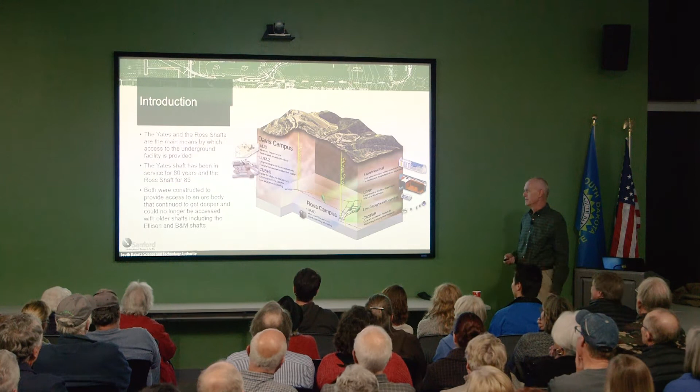This graphic here is a nice representation that shows where the Yates and the Ross shafts fit relative to the 4850 level and a lot of the experiments that are either under construction or being built. And it basically shows how important those shafts are. They are the way to get down to where the science is happening. The Yates shaft has been in service for 80 years, and the Ross shaft has been in service for 85 years. Both originally were constructed to provide access to an ore body that continued to get deeper and could no longer be accessed with the older shafts. And those older shafts were the Ellison and the B&M shafts.

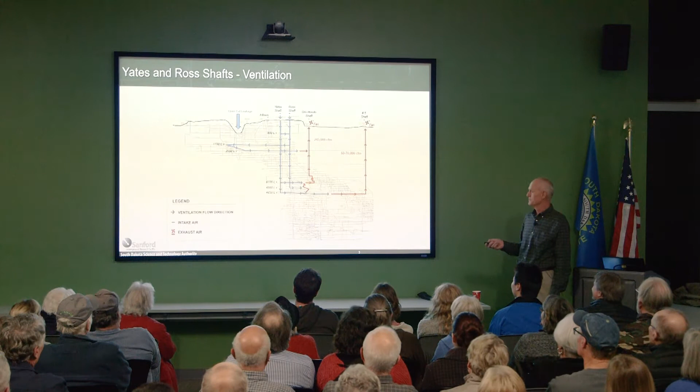So another important feature and function of the Yates and the Ross shafts is that not only do they provide access to the facility, but they're the conduits by which the fresh air enters the mine, the lab. So on this representation, you can see the long section of the old Homestake mine workings and where the Yates and the Ross shafts fit here. And the blue color and blue arrows represent the fresh air that goes into the facility. So this demonstrates that this is also an important feature. This is what makes the Yates and the Ross shaft very important to the operation of the facility. So we're going to talk a little bit first about the Yates shaft.

So the Yates shaft was constructed for two primary reasons. It was constructed after the Ross shaft was done, and it was well known that the Ross shaft would not be able to keep up with the production demands for the Homestake mine. In addition to that, the Ellison shaft was reaching the end of its life, and it needed to be replaced. So construction began back in 1938 and was completed in 1941.

The shaft was named after one of the general managers for the Homestake mine, a guy by the name of Bruce Yates. Not unlike a lot of other shafts, it was constructed in phases. First phase got it down to 4100 level, and eventually it was deepened to the 4850 level in 1954.

And the type of construction that was used for the Yates shaft involved what is called a pilot and slash method. What this basically means is that raises were driven from the bottom level all the way up to the very top, which creates a pilot hole. And how that's advantageous is that it enables the excavation to be done from the top down, and the blasting is basically done into the pilot hole. The muck falls to the bottom, and it speeds up the whole process of shaft sinking.

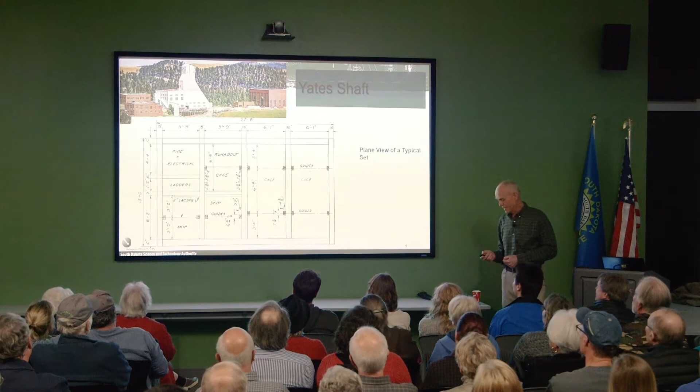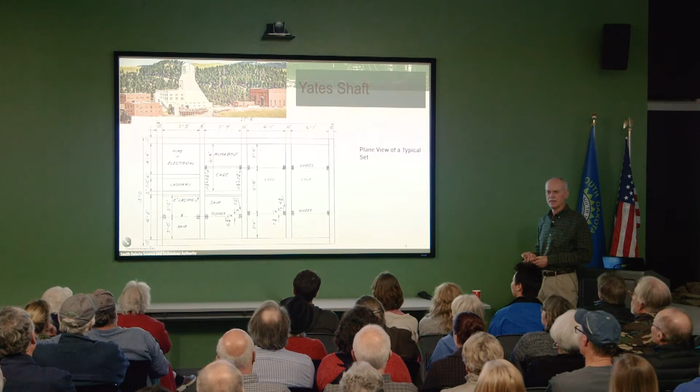So this is a plan view of a typical shaft set for the Yates shaft. The dimensions are 27 feet 8 inches in this long section and 15 feet in width. And it shows you the various compartments. There are 2 cage compartments where the cage conveyances ride up and down. There are 2 skip compartments. And then there's basically compartments here that support utilities.

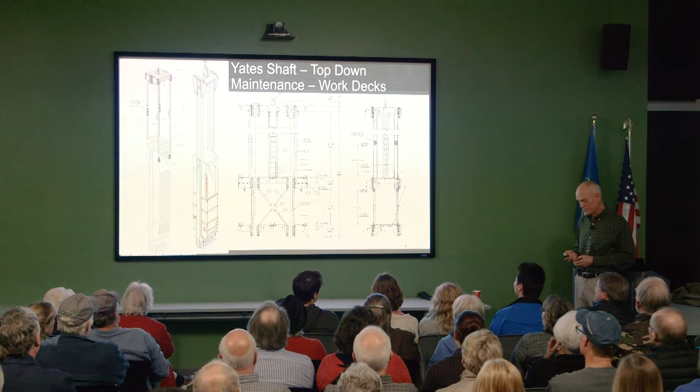So over the last few years, basically starting back in 2008, when re-entry was established to develop the Sanford Lab, the timber furnishings needed to be refurbished. So a maintenance program was started, which basically utilized these unique kind of conveyances for performing the maintenance work.

So these 2 figures right over here show special work decks that were used in the skip compartment. You can see that underneath these conveyances are these skips, which are the conveyances which raise and lower, which bring the waste rock out of the mine. But they basically retrofitted them with platforms on top, so the guys could stand on top and do their work. And then in the cage compartment, a special conveyance was built to provide the platforms for the guys to work off of.

I'm not going to bore you with these numbers here, but if anybody's interested in a lot of the data in terms of the dimensions, the speeds of the conveyances, they can talk to me about this afterwards. But, generally speaking, I think what's of interest was that the hoist operating speeds in the past, the cage and the skips would operate between 1,300 and 2,500 feet per minute. But now, during this heavy maintenance cycle, the speed of those conveyances has been reduced to 500 to 800 feet per minute.

So just to show you a few of the steps that are involved with the work that's going on in the Yates shaft with what we call top-down maintenance. The way things work is the crews go down and they first of all remove the lacing. And lacing is basically a series of planks that are installed vertically around the perimeter of the shaft. That lacing would provide support for the timber sets, but it would also provide a ground support for the rock behind it. Anyways, over time, a lot of the rock has dislodged there and loosened up.

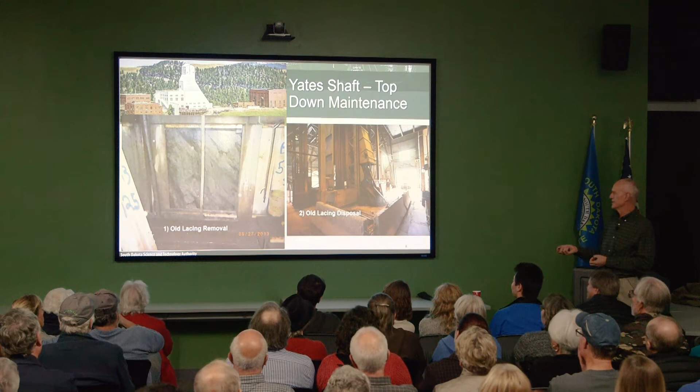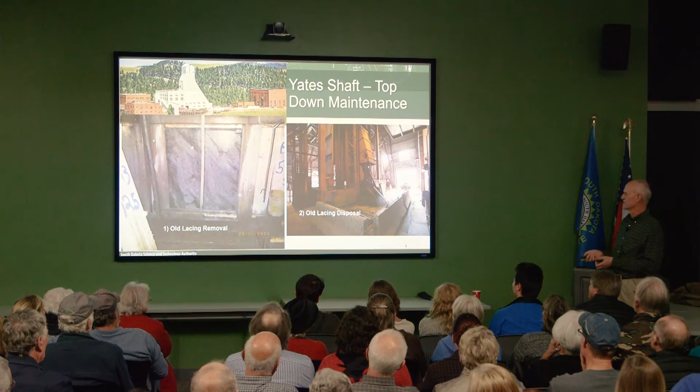So part of this top-down maintenance involves removing the old lacing, and this figure here shows that the old lacing and some of the other rotten timber gets dumped into the skip, and it's brought up to the collar and basically dumped in this place over here, where it's then picked up and disposed of. And then, once the lacing has been removed, the guys come in and they install rock bolts and mesh to secure the ground, and then the timber lacing is put back in place, and other reinforcement of the timber is provided as well.

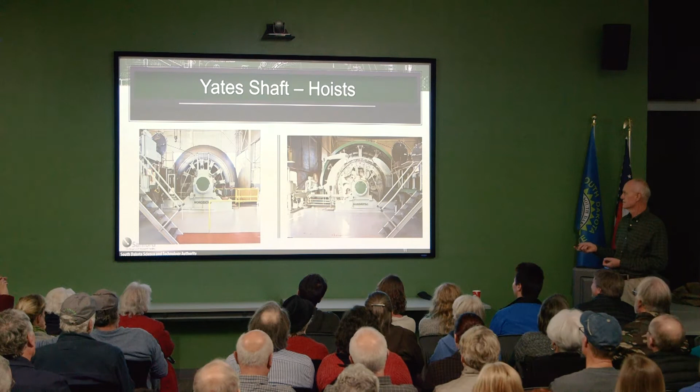So this next video I have is of the delivery of the LZ experimental equipment. And this was taken, I want to say, maybe 3 or 4 weeks ago. An important step with an experiment that's specifically designed to search for dark matter. So we'll just run this through.

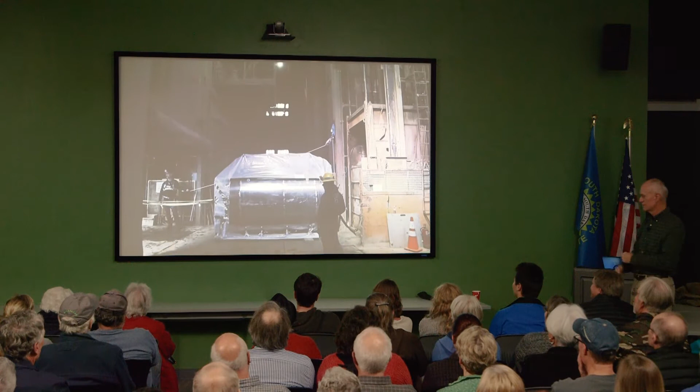How do you get a 5,000-pound, 9-foot-tall dark matter detector nearly a mile underground? Very carefully. In Sanford Underground Research Facility's surface cleanroom, the LUX-ZEPLIN collaboration spent months assembling LZ's inner detector. In October, it was ready for transport underground. This high-stakes move was meticulously planned and practiced. It required transporting the detector from the clean room to the Yates headframe, down a mile-deep shaft and through a narrow drift on the 4850 level, all without damaging or dirtying the detector. To keep LZ well sealed from any contaminants during its journey, the detector was triple wrapped in protective plastic and secured in a frame for transport.

A forklift slowly carried the detector to the Yates headframe. There, engineers carefully attached the frame to the underside of the cage with slings and straps. The detector narrowly fit in the elevator shaft. A trip that normally lasts 12 minutes took over an hour as the crew slowly moved the detector nearly a mile underground. Once detached from the cage on the 4850 level, the detector was moved through the drift using air skates on a temporarily assembled surface. That evening, LZ collaboration members around the world received news that the move was successful. Now the detector must be installed in the Davis Cavern water tank. There, in 2020, LZ will begin its search for dark matter.

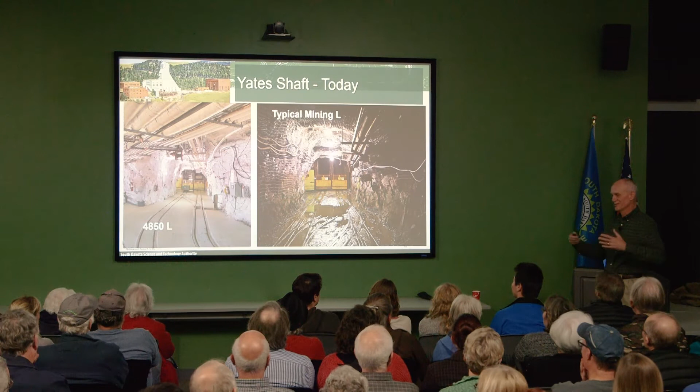Most of us who work at the lab basically go down to the 4850 level and everything's nicely lit up. We've got walls that are painted white, and really, it almost has an office feel to it. The rest of the levels don't have that look at all, as you can see.

All right, so what about the future of the shaft? Essentially, the shaft is integral to the future of the Sanford Lab.

The timber sets in the shaft are not a long-term solution. Currently, the shaft is available only 40 hours per week to support science, and the rest of the time is taken up with shaft maintenance. So that's a lot of time that is not available to be used for access purposes.

So the SDSTA is currently investigating potential shaft refurbishment options. The final solution will depend on requirements, costs, construction schedule, and available funding. So all I can say is stay tuned, and we'll see what comes out of that.

So now let's transition over to the Ross shaft. The Ross shaft is the one that I spent the most time on, so I have a pretty solid understanding of what we've got going on there. So the history, just to give you an idea, approval was provided to construct the new shaft back in October of 1932, and the shaft would be put into operation basically 26 months later, which is just over 2 years.

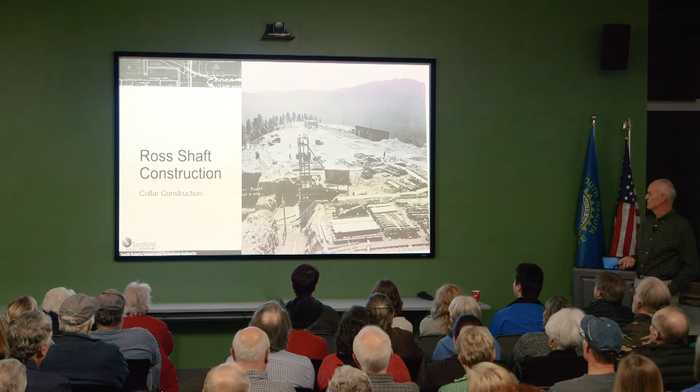So now the site is being developed. You can see more construction going on. There's the mini head frame that I was talking about before. And so now they're starting to open up the foundation for the construction of the crushers. And you can see all the lay down for all the steel that was part of that construction. And now this is a nice photo of the crusher, the big building where all the crushing of the material was done.

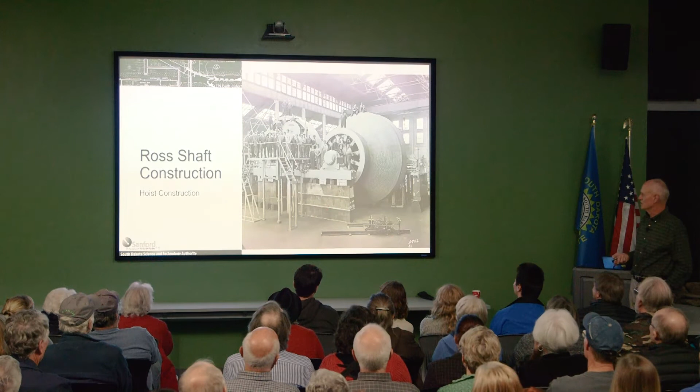All right, so now let's fast forward, and the Ross shaft has been used for about 70 years. But let's keep in mind though that most shafts are built to last about 50 years. Okay, so even pushing it to 70 years was really kind of stretching its overall duration of service. But after 70 years, Homestake was shut down and the Ross shaft was buttoned up. And in 2007, the decision was made to convert the underground mine into an underground laboratory. So now the Ross shaft would need to be an important part of the future of the Sanford Lab.

So when we look at doing a refurbishment of the Ross shaft, we've got to first of all start asking some important questions, like what are the requirements for developing and maintaining a lab underground. So what does it need to do? Again, provide access for men, equipment, and materials down to the 4850 level.

This shaft is going to have to provide waste rock hoisting. We're not hoisting waste rock right now, and there's a lot of work that's being included in that refurbishment that will re-engage that waste rock hoisting capability. It has to provide emergency egress, and it has to provide long-term service. We're talking 30 to 50 years.

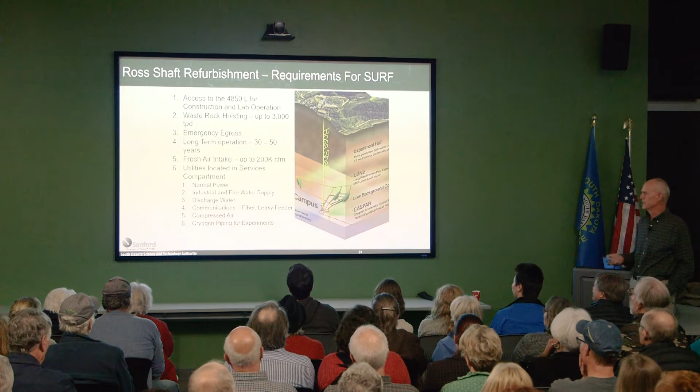Again, it needs to provide a conduit for ventilation, and we've got to put a lot of utilities down. We've got normal power, we've got industrial and fire water supply. The discharge water system has to go up the shaft. Communications, compressed air, and cryogen piping for experiments. And I'm going to have a slide a little bit later on that's going to show a little more detail on that. So what was the condition of the existing steel before we got started?

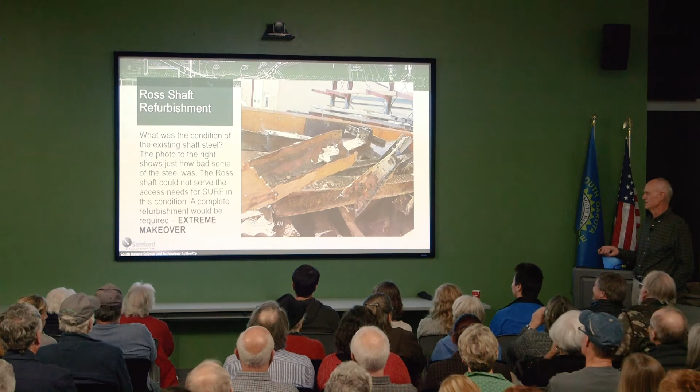You might notice that this webbing over here has got a bit of daylight showing through it, okay? I wouldn't call that really strong from a structural perspective. A lot of the steel we took out looked like that, so it badly needed to be changed. And like I said before, most shafts, if you get 50 years out of them, you're doing good. And they pushed it all the way to 70 years. Essentially, the Ross shaft could not serve the access needs for SURF in this condition. So we're talking extreme makeover here.

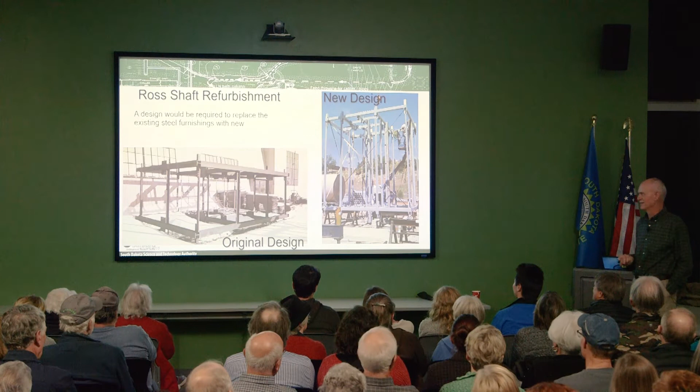So the refurbishment work involves building new work decks, basically taking out the old cage, which is now parked in the visitor center here, and replacing it with special conveyances that provide access for the guys to do the work. So this is just a graphic showing the new steel sets in the shaft with the work decks suspended in there.

So what are the steps involved with refurbishing the shaft? First, you go in and you cut out the steel. So you've got guys with torches, and piece by piece, they're removing the old steel. That steel gets dumped into one of the conveyances. One of the skips is still in place in the Ross shaft, and they would dump the waste steel in that conveyance, hoist it to surface, dump it into these bins that you can see right over here, and then ship it off to recycle.

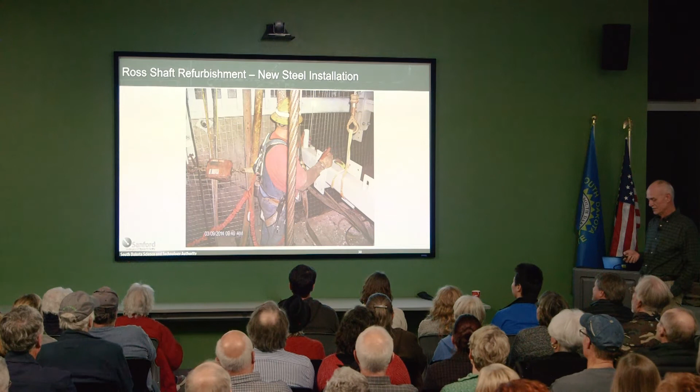After all the steel is removed, ground support is installed. So you see a nice picture here where Jerry Hinker and James Gregory are installing ground support in the shaft, working off those platforms that I was describing in the previous slide. Then comes time to install the new steel. All the pieces are lowered with those conveyances, and piece by piece they are installed.

And this is kind of a bird's eye view of steel installation going on at what we call a bearing set. Bearing sets are installed at every 10 sets, or about 180 feet, and they are the load bearing sets. You can't just start from the top, hang all the steel sets, and expect it to be able to support that load. So you've got to break it up into intervals. These bearing sets are anchored to the wall and support a series of 9 sets below it.

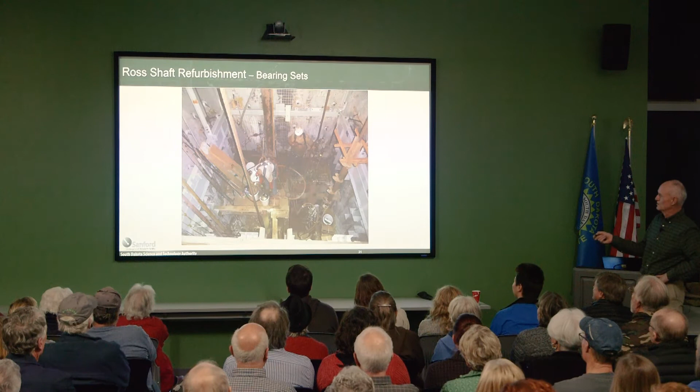So the procedure is, once all the ground support is installed, you hang what are called studdles from the set above, and then you install the perimeter steel around it. And once the perimeter steel is in place, then you put all the steel in between.

Now, as part of the installation of these bearing sets, you've got what are called saddles, and essentially these are special welded components that are anchored into the rock wall. There's a number of rock anchors that are drilled into there. So every one of these bearing sets has 6 of these saddles, and that's what bears the weight of all the steel that's in the shaft.

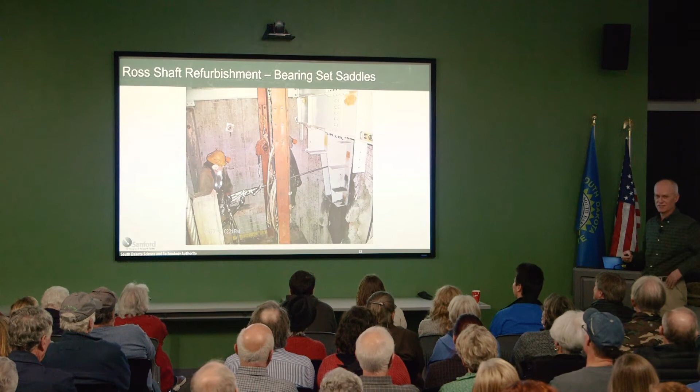So one of the challenges that we had in the Ross shaft was in the section of the shaft that's called the Ross pillar. The Ross pillar covers about 1,000 vertical feet in the shaft. And that section of the shaft actually went through part of the ore zone, okay? And that ore zone was under a fair amount of stress. And what happens over time is that if you create an opening in a section of highly stressed ground, it tends to want to squeeze over time.

Now you can imagine trying to run the conveyances up and down through the shaft, and they're kind of weaving in and out. Especially if the steel is squeezing, the conveyances can get stuck through there. So one of our big challenges as part of this project was to fix that problem. But that was a significant challenge.

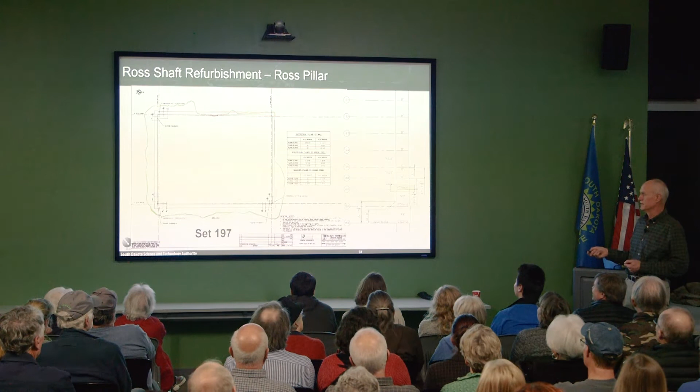So one of our big challenges was, well, we've got to mine that out, but we can't drill and blast it, which would be the most efficient way of doing it, because we have to maintain access through the shaft as it's being refurbished. We've got utilities that are running through the shaft. It needs to continue to serve its purpose as an emergency egress. We've got to figure out a way to deal with this without interfering with those other functions. Basically what that means is we're going to have to employ non-explosive excavation techniques.

All right, so let's take a bird's eye view of the Ross shaft as we're looking down. In this particular slide, we're standing in the cage compartment over here. You've got the south skip, which runs in this compartment over here, and the north skip. So these are the rock boxes that run up and down the shaft. There's the counterweight compartment.

Just so that you know, you need to have a counterweight that runs in counterbalance with the cage conveyance. That makes it much more efficient from a hoisting perspective. It balances the loads a little bit more. Now, the skip doesn't need a counterbalance because one skip counterbalances the other. And then in this northwest corner, you've got a section which is called the manway compartment. Even though it's not shown in here, there are ladders and platforms in here to provide emergency egress for folks as well.

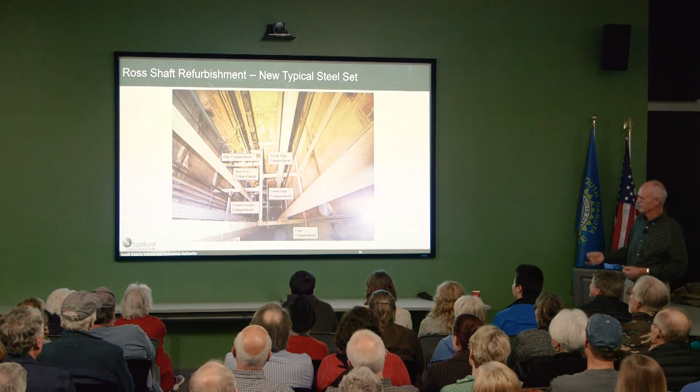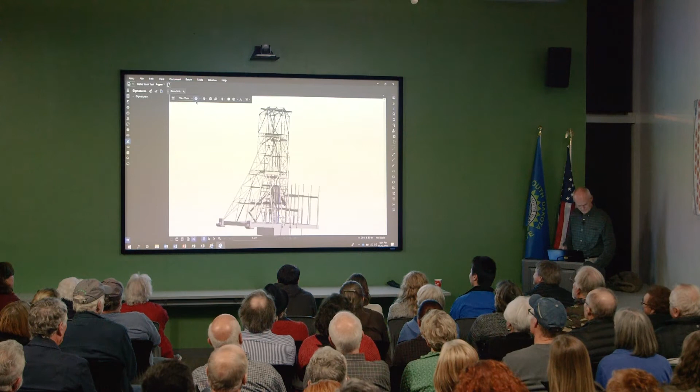And you can see that in the figure beside here, because we have a whole bunch of pipes that have to come down the shaft, cryogen pipes, that are necessary to operate DUNE and bring the argon underground that's going to be in these large detectors. So you've got argon pipes, you've got nitrogen pipes coming down the shaft, and you see this large structure that's built to support the pipes as they come out of the shaft.

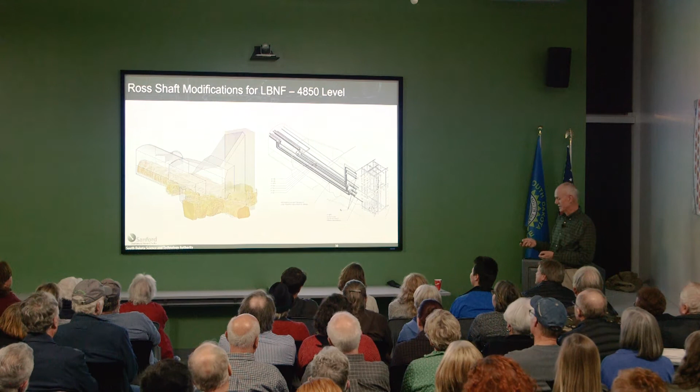And we also have to consider that there are going to be large components of the DUNE experiment that are going to have to be brought underground. And we've made some changes to the cage conveyance, that I'll show in another slide, to enable that to happen. Basically, those large pieces have to be swung out of the shaft, so we've got to make enough room for them to be able to be swung out of the shaft.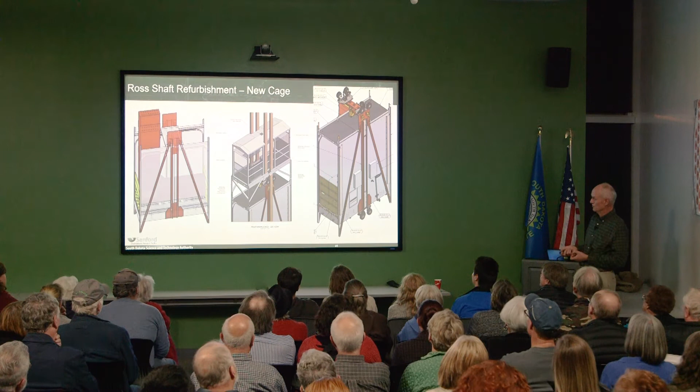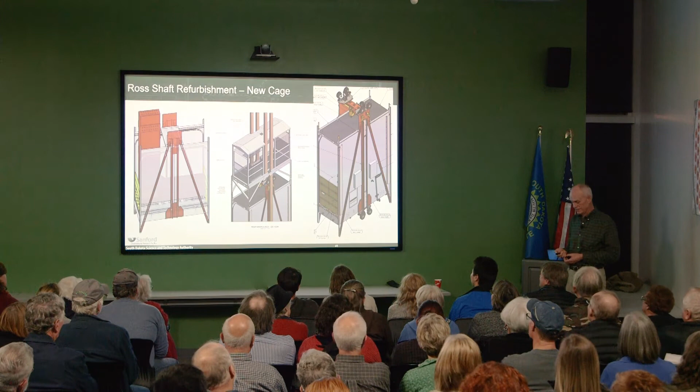So we have the roof. There's components of the roof that can be removed to enable these special components to be brought underground. And we've also got a special deck that can be set on top of the cage so that the guys can do shaft maintenance as it becomes necessary. We've got new skips that have been built for hoisting the waste rock from underground, and that's basically what they look like.

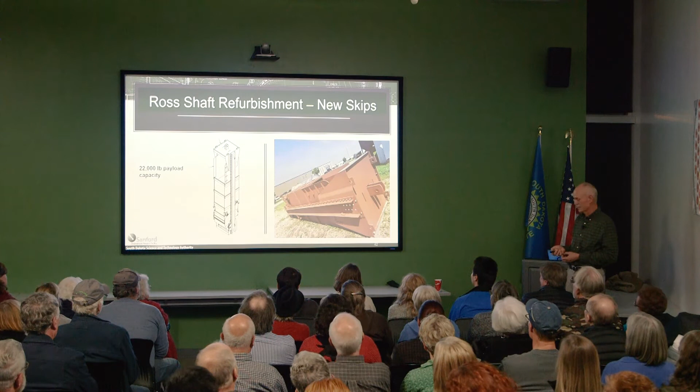So after that, I thought, just a few fun facts about the Ross Shaft. Okay, what is its total depth? 5,132 feet, the height of over 3 Empire State Buildings, okay? The other thing is it's like 6 times the depth of the open cut. We can look out the window, and I can't see the bottom of the open cut. You need 6 open cuts to get to the bottom of the Ross Shaft.

The total amount of steel that we put in the shaft: over 7 million pounds of steel has been put in. Top speed of the conveyance, over 30 miles an hour. And the time it takes for a tape measure to free fall from the top of the shaft to the bottom, 18 seconds if it doesn't strike anything on the way.

You knew that was coming, didn't you? I know that from experience.

For interest's sake, the total cage travel time: a one-way trip with all the upgrades we're going to do is an 8.5-minute trip. Now it's a 15-minute trip, and so I'm really excited to see, when we get everything done, just how much faster everything is going to be operated.